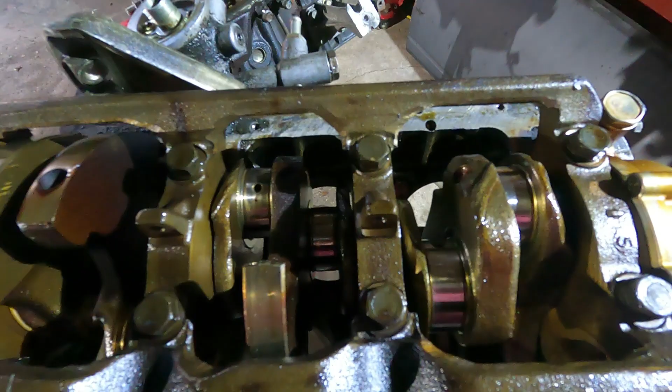So we've got both of our engines back up here front and center. So what I think we may have decided here, I may still open it and check, but since all of these rod journals look so good, we're obviously going to measure them, make sure they're within spec on an X and Y axis. And we may just leave it like this without switching it to the other block.

The only reason is because some of the other block has got a little bit of rust from sitting with all the stupid humidity that we've gotten. Haven't decided 100% yet, but we'll definitely check out the bores before we say for sure. But so far everything's looking good, feels good.

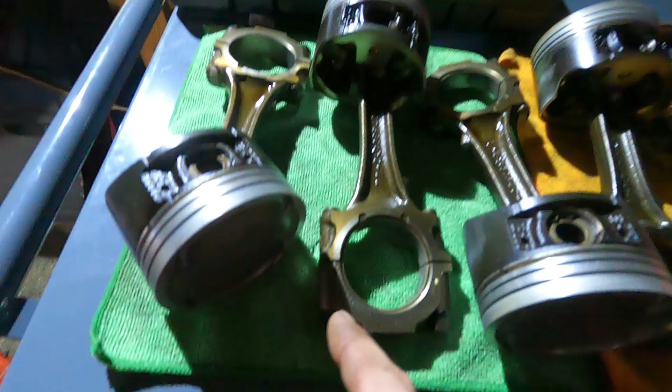Pretty much what we're going to do next, getting all of these tightened down to the torque spec, which I've got my manual over here to check out, and then we will measure with our bore gauge up here, zero that out, and then measure with our micrometer here.

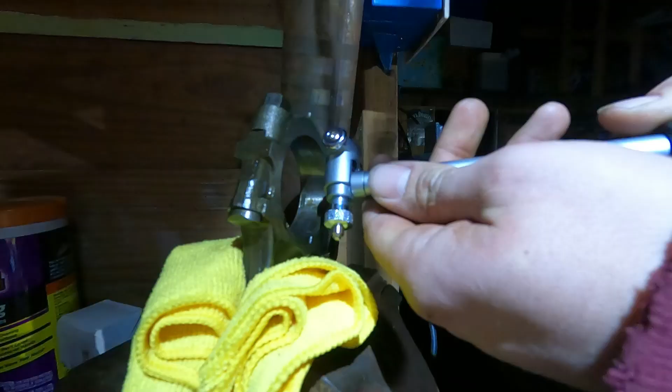This thing's not the best at focusing, but so far we've been within spec on each connecting rod side on the large end without a bearing. Now we're on to number 5, but take your bore gauge, place it in here, and all you're going to do is get the lowest point throughout your rod bearing.

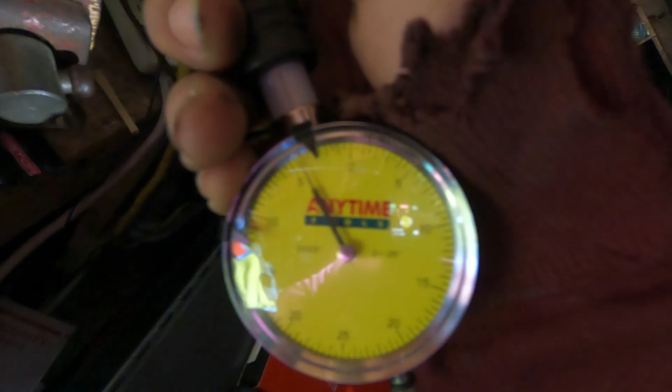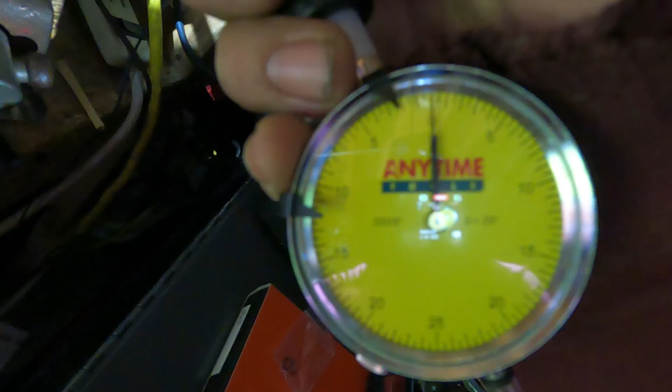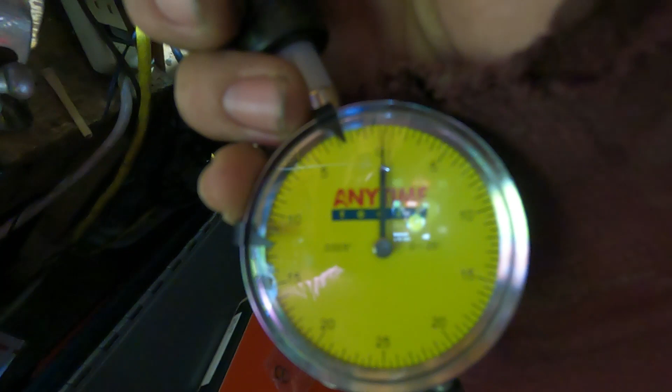And at the same time, you can see right here is the 0. You're trying to get your lowest spot. You'll rotate the outside of your bore gauge up to where your highest spot, or lowest, I guess you could say, is 0. I only said high because you see it moving above the 0. So I need to adjust it slightly.

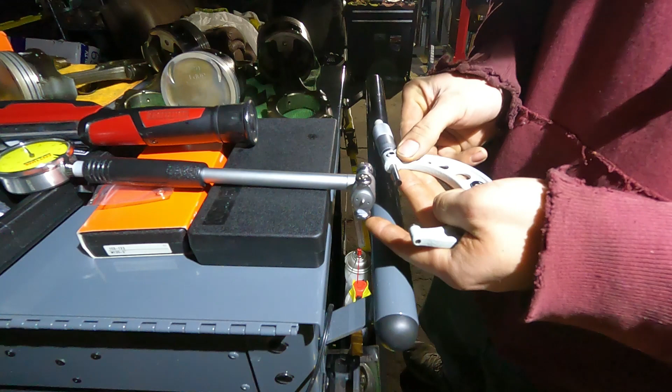What we'll do here now is we'll use our micrometer. We got a 2 to 3 inch. And all you do is, as you adjust your micrometer here, you watch your bore gauge as it goes back to 0 as you move it, lock it, and that'll be your reading. Alright, now you lock it.

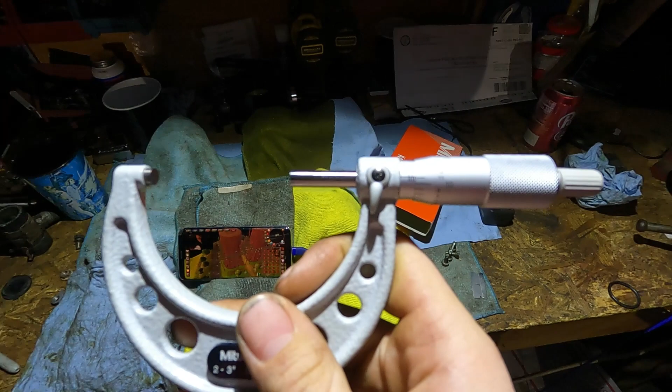I already know this is not read, at least on the camera end, but here, and how can you focus this thing? It's super hard to read, but we're a little bit past 11, which there's 25 notches all the way around this, and that's 25 thousandths.

So there's 4 sets of 25 thousandths per 100 thousandths. I believe that's the right number, but we're right above 11. So you add 11, 75, since we're past the 3rd mark, and there's 4 in the whole segment. That means we're at 2.086,

and that will be our measurement, which the spec is 2.0866 to 2.0871. Once again, right here, 2.0866 to 2.0871. So once again, we're within spec here.

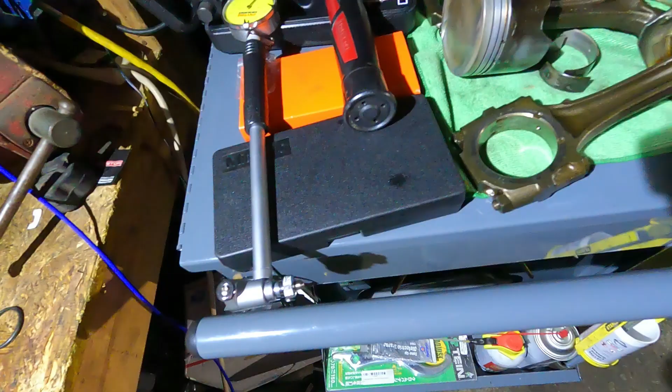So we're going to flip it. We're going to measure our y-axis. Now here again, it's the same thing or concept. You just do it from the other angle. This clip went on too long. Pretty much all we are going to do is do the same thing for the last one. Again, these are measured without the bearings inside.

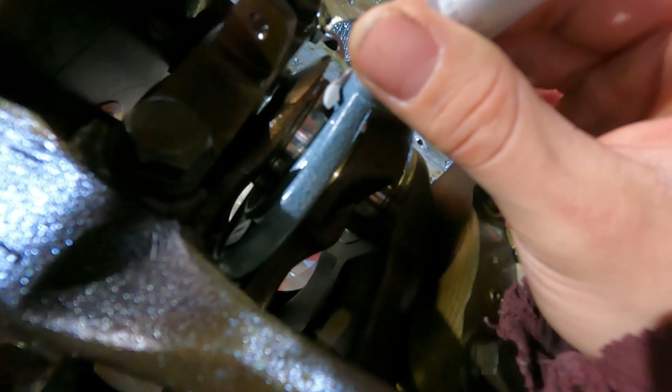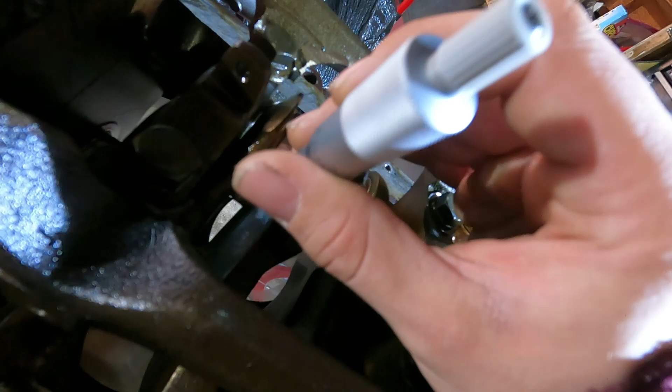So I've got it set up on the max clearance. And what I did, set it up where I can eyeball it, make sure that the anvils on both sides will be clearing, and slowly just twist it around. As you see, it's on both sides, and I can spin it around. So that tells me, because you don't want it too tight, obviously you don't want to scratch and gouge your journals, but we're all in spec, we're good there.

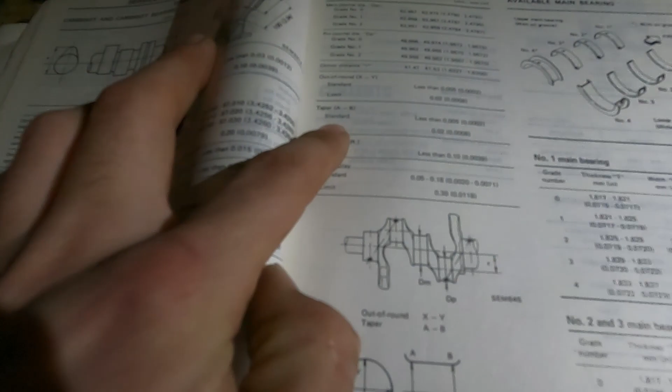I don't really know how I'm supposed to measure A to B. Yeah, so you got A to B's taper, out of round is X to Y, as you can see down here, X, Y, A, B. So that's what I've decided.

I've just kind of cleaned up the journals, got all the old oil off with a microfiber cloth, shined them up a little bit, at least what I can get to. It's kind of hard to get to the other side, but I'll make something happen. I'll cut a strip of cloth to fish through there.

Now we're going to look for some oil so we can cover this up and get it lubricated, so that way we have no chance of rust coming here, because we got a little bit of rain coming in this evening. But just want to make sure everything is all fine and dandy.

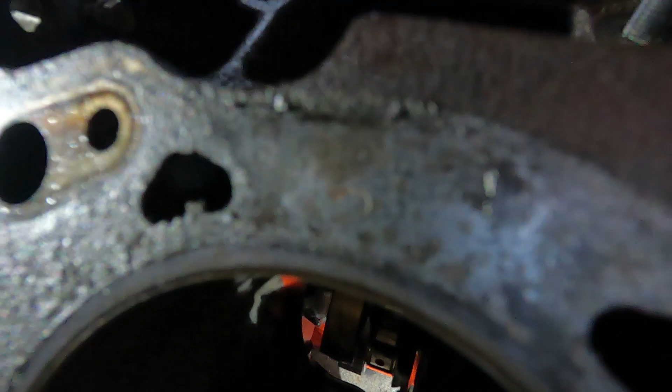Hopefully you can see it. GoPro likes to not show things. Right there, there's a 2. There's a 2 on each cylinder. And you know, that's fantastic, because there's a 2 there, there's a 2 there, and there is on all of them.

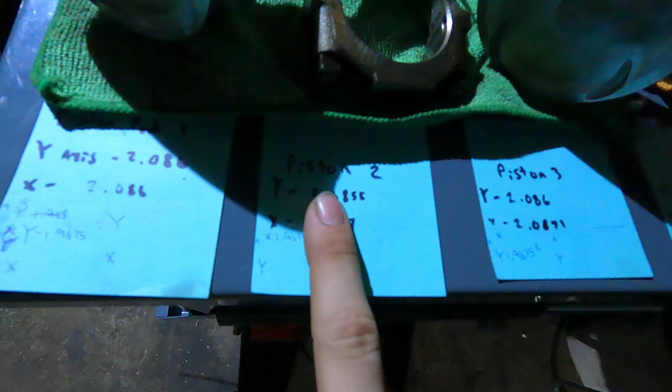So the pistons that we've already selected, we selected them because they look the best, and it just turns out that they happen to be the exact grade that we're going to need. So it's kind of perfect. However, upon seeing some specs, as far as our pistons and rods and stuff, piston 2 and 4 are out of spec.

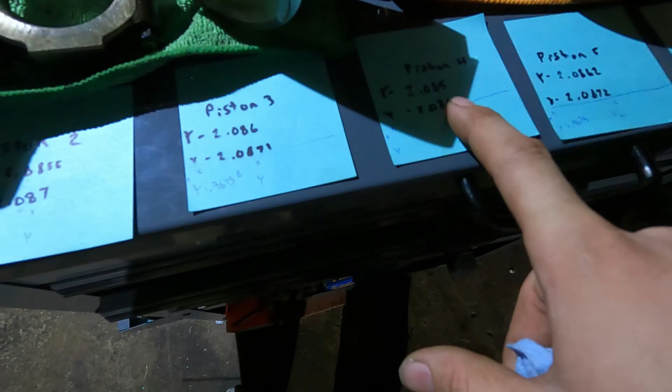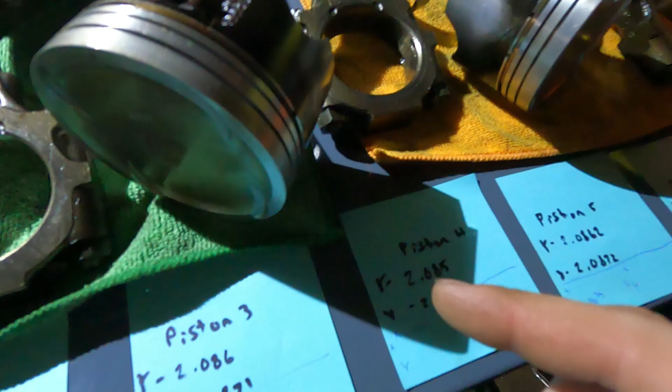Which I don't understand how, I guess. How does it get smaller than it was? I don't understand how this hole can get smaller over time. You get what I'm saying? If it's moving and it's rotating and working against a crank, and say if there was to be wear, would it not make it larger?

I mean, I get that the bearing's there to prevent that from happening. Some of them had some wear, but I would think, if anything, that this would make them larger. So, I don't know. We may remeasure them. I don't want to say we'll just send it, but for all I know, it could just be an inaccurate reading, which I pray is not the issue or the case.

But I did some research. I think we're going to go with OEM bearings. We're not going to go with aftermarket bearings. The reason being is they're going to be good for all that I'm going to be asking of this. I haven't really decided what the goal for this is. There really wasn't a goal. It was kind of just to work.

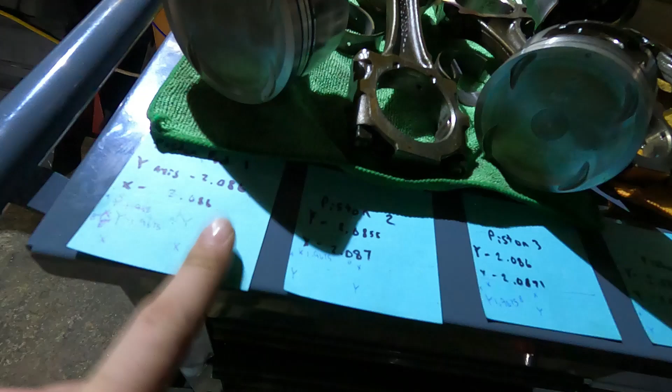So what I think we're going to do, we're going to order, or at least check out a couple rods over here that we have. See if we've got at least 2 in spec. And if not, I would have to remeasure these just to verify, because my micrometer doesn't read that low pretty much. So I can't 100% say for sure.

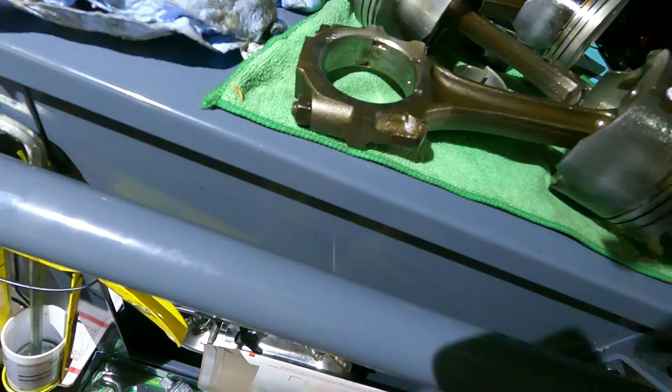Forgot to mention, the way to figure out your rod bearings for a stock assembly, if everything is within spec, you'll see on the side of your rods, you can see there, 0F0, that is a grade 0 rod. And here, you can see I found on my crank it says 212121.

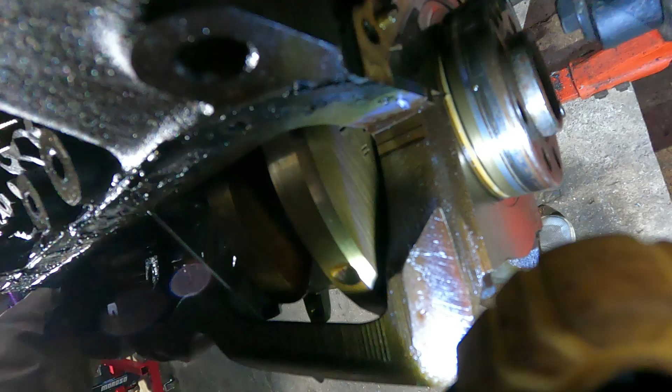That is because you can see the numbers in there. 1 2 1 2 1 2. You actually read it this way: 2 1 2 1 2 1. Those will be your rod bearings.

If you want your main bearings grades, up here you can slightly see them. It's 1 1 1. Other one says 2, I believe. So that's how you read your main bearings. I don't think we're going to be messing with mains. Yeah, that may be a horrible idea since I'm already in here. But we may just order them since we know the grades and whatnot.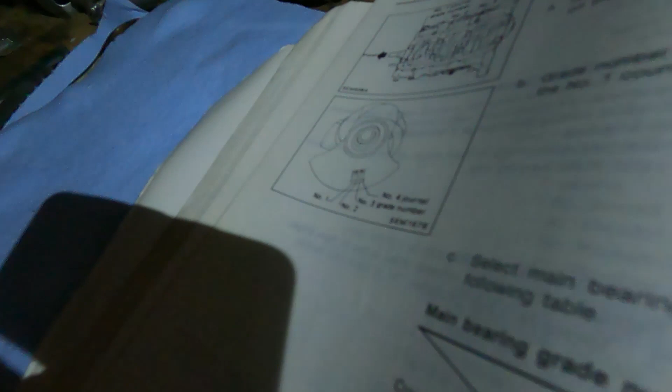So there was how I showed you how to check these main numbers. Also what you need to use to reference main numbers. Alright, so to figure out your main numbers, you will read these numbers here on the crank. Which you see those couple numbers.

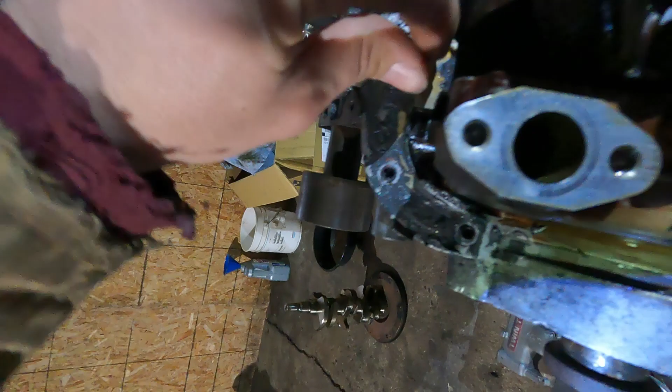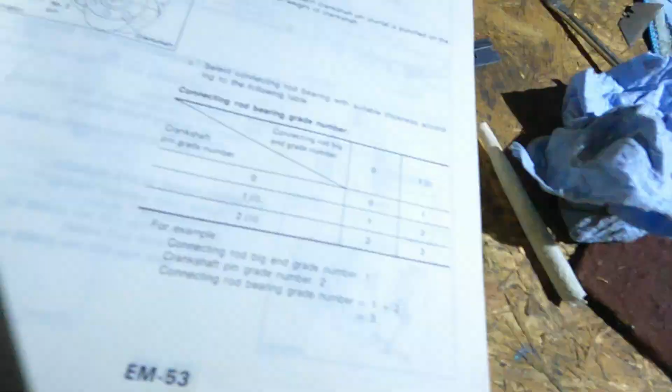Also, what you look at is there is stamping right here, and you check this, and on each main cap there's one. You see there's a 1 over here. There's the top of a 1, another 1, and a 2. You do the same kind of addition there, just as you see over here, in the same sequence, add them together, and that is how you get your main bearing grade.

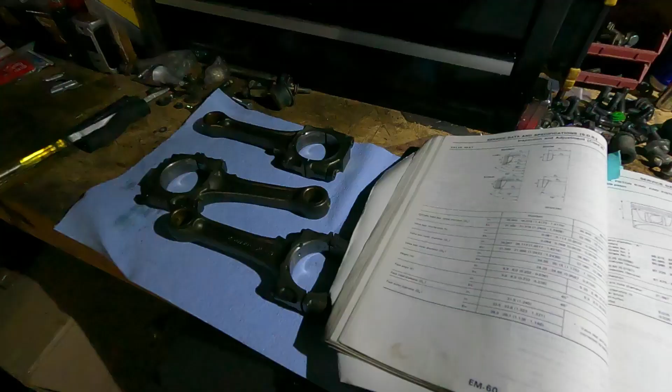So we've got 4 backup rods over here. Luckily they're all the same grades, so it's a plus. I think we're going to end the video here. We are going to order main and rod bearings for the correct grade for this engine. We will also be ordering piston rings for stock application. I think we're going to get to assembling that hopefully sometime soon.

I did just witness thermal expansion from a first-hand perspective. None of my readings are coming out the same. It's what, 20-30 degrees colder outside. It's 30-40 degrees at most. So that's a first for me, but glad to know that that is a real thing. I can't say it's going to expand as much as it has shrunk when it gets up to say 50 to 70, which I would think would be a good temperature.

If I have to, I'll sit them in the sun or something for a little bit, or in a car, just so that they get some of the greenhouse effect to get warmed up, or shoot, maybe I'll even take them in my room, let them get acclimated and measure them out. But either or, I know we're going to have a set of rods here. I've got those 4 there. I've got another 4 back here in a box that I pulled out of a motor that's back here.